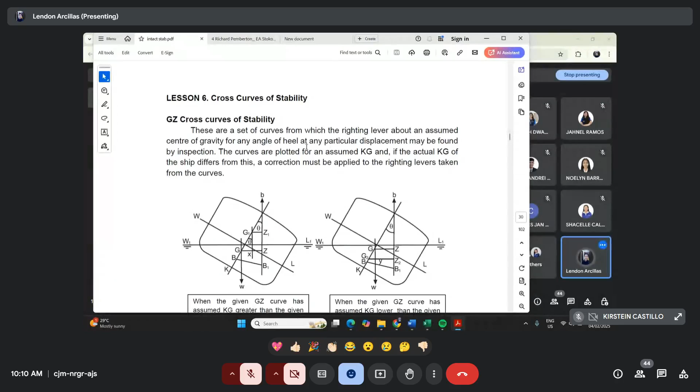Yes, okay. So, cross curves of stability. What is cross curves of stability? Beforehand, there are two types that we call cross curves of stability—the GZ and the KN. I just need two tabs for writing this down.

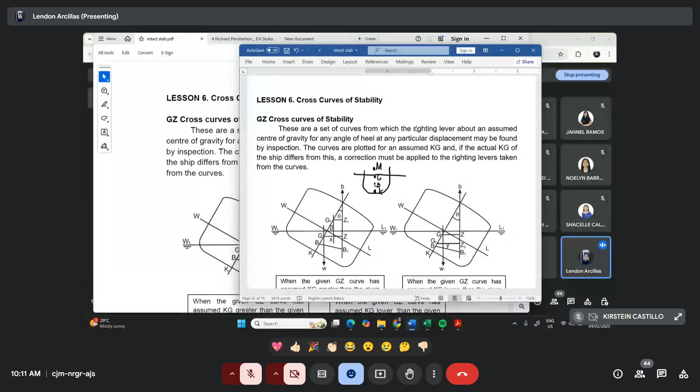When we say cross curves of stability, it pertains to the value of our GZ. We included this before in the moment of statical stability, that's MSS, which uses our GZ. So this is part of our properties. We already have, in our properties, the K, M, and B values, and now we added another property called GZ.

GZ is defined as the righting arm. Let me draw this—this is Z. GZ only occurs when the ship tilts or inclines. So we can only see the GZ when our ship is inclined or listing. GZ is just the distance between the center of gravity point, which changes, and the point where buoyancy acts.

For example, when our ship inclines, the point of center of gravity changes. Of course, the center of gravity itself still remains the same, but the center of buoyancy will change. So this is the center of gravity, and this is the center of buoyancy. When the ship tilts, that's what happens.

The distance from G to Z is what we call GZ. GZ is very important because it is a function of the angle of heel. This is GZ—the distance from G to Z. That's the righting arm needed to find the moment of statical stability, since we need W times GZ, wherein GZ can be found using GM sine theta.

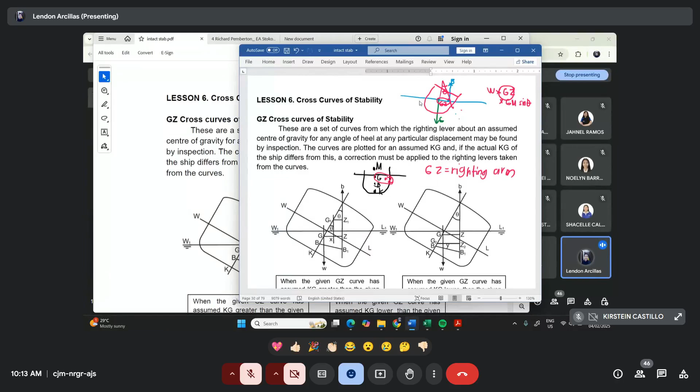So now GZ makes sense. That's our focus now—to find the value of our GZ at any particular angle. It's very important because we need it to analyze the stability of our ship. We can get the moment of statical stability, we can get the dynamical stability, and we can determine when our ship will sink or capsize through the value of our GZ.

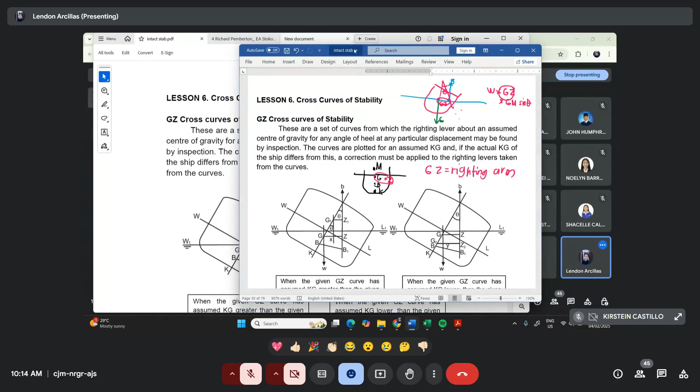So again, there are two types of GZ cross curves: the GZ cross curves and the KN cross curves. For the GZ cross curves, we are given an assumed KG in the problem. Our KG can be found or determined through the inclining experiment. It is very important to conduct an inclining experiment so we can first determine the light KG.

That means that's the first KG of your ship. So our ship really has a KG, and we determine that through the inclining experiment. That's why we have to conduct an inclining experiment, so that we can know the value of our KG assigned to the ship.

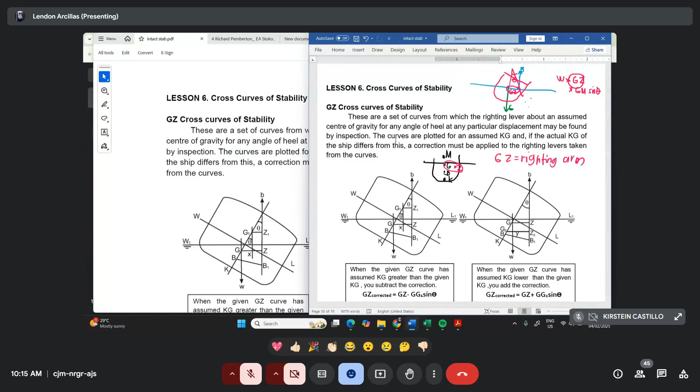Let me repeat the definition. These are sets of curves from which the righting lever, about an assumed center of gravity, for any angle of heel at any particular displacement, may be found by inspection. The curves are plotted for an assumed KG, and if the actual KG of the ship differs from this, a correction must be applied to the righting levers taken from the curve.

So again, the purpose of these cross curves is to find the GZ. There are cases where our given KG in the problem or in our ship is higher or lower in value than our assumed KG. What is the assumed KG? The assumed KG is this one.

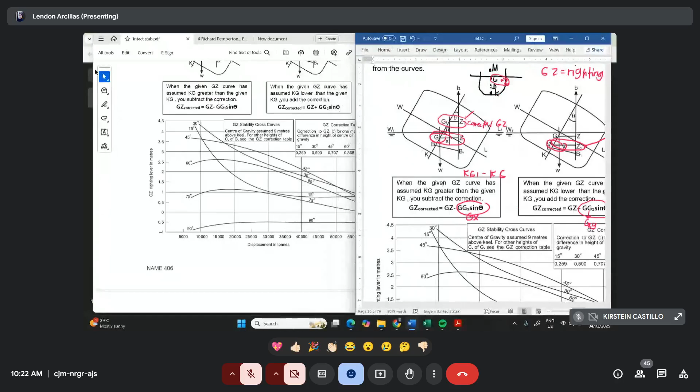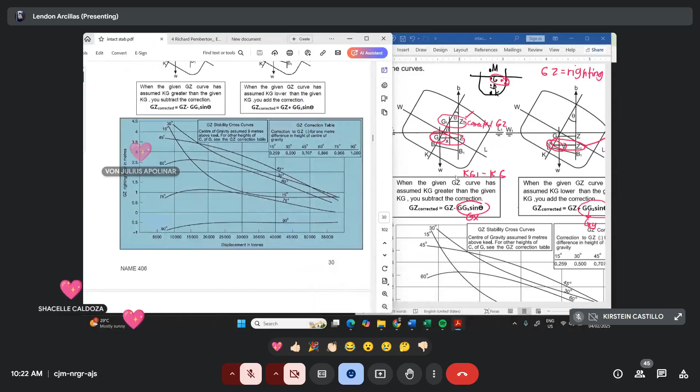Hello? I don't have a mic. Okay, so let's have a problem, to make it clearer.

I just need a graph, that's why my screen looks like this. Using the stability cross curves for a marine vessel tanker. This is the marine vessel cross curves of stability, our reference. This is assumed. Find the GZs at 15-degree intervals between 0 to 90 degrees when the displacement is 38,000 tons and the KG is 8.5. This is the given kg.

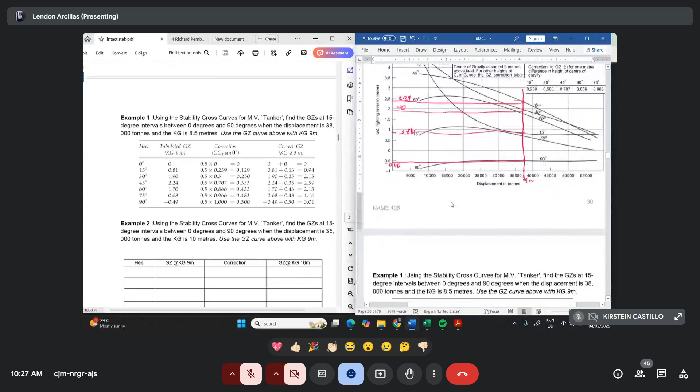Okay, that's the GG1. Next, the sine angle - this is just sine 0, which is 0. Sine 15 is 0.259. Sine 30 is [0.5]. Sine 45 is 0.707, sine 60 is 0.866, sine 75 is 0.966, and sine 90 is 1. Got it? So this is GG1 times sine angle.

That's the value of your correction, which is to be added to our tabulated GZ or assumed kg. Since our given is smaller than the assumed: 0 plus 0 equals the corrected one, then 0.81 plus 0.13 or 0.129, then 1.9 plus 0.25, 2.24 plus 0.35, 1.7 plus 0.433, 0.68 plus 0.483, and negative 0.49 plus 0.5. This is your corrected GZ for the specific problem.

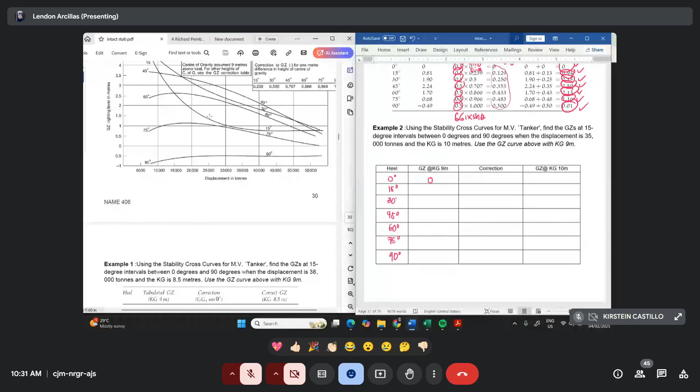Based on my eye estimate, the value of GZ at 0 is 0 since there's no cross curve data at 0 degrees. So at 15 degrees, 35,000 tons, I estimate it's around 0.9.

At 30 degrees, 35,000 tons, this is 2.2. At 45 degrees, this is 2.7. The value really gets bigger here.

If you imagine the drawing from earlier, as the ship inclines more, the more the point of G and point of B separate. G moves further from B - that's the GZ, the distance from G to B.

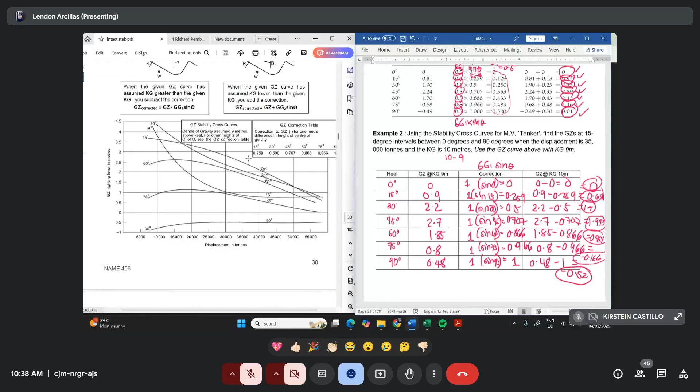So, to recap: when the given is smaller than the assumed, you add. When the given is higher than the assumed, then you subtract. So it's not always the case that the given KG is 9 - I'll give other assumed given values. That's it, no problem.

So that's the GZ cross curves. We also have what we call cross curves called KN. It's the same as GZ, but the difference is the value of KG is always 0.

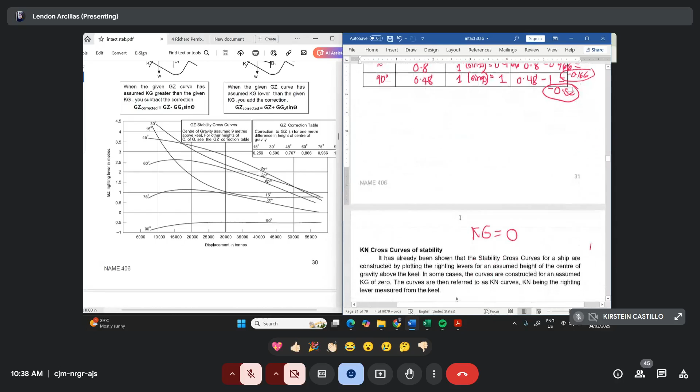Earlier in our given, we had a KG to input, like 8.5 and 10 - not higher than 0. But when we assume that KG is 0, then we'll have to use the KN cross curves of stability.

So, assume KG is 0. It has already been shown that the stability cross curves for a ship are constructed by plotting the righting levers for an assumed height of center of gravity above the keel. In some cases, the curves are constructed for an assumed KG of 0.

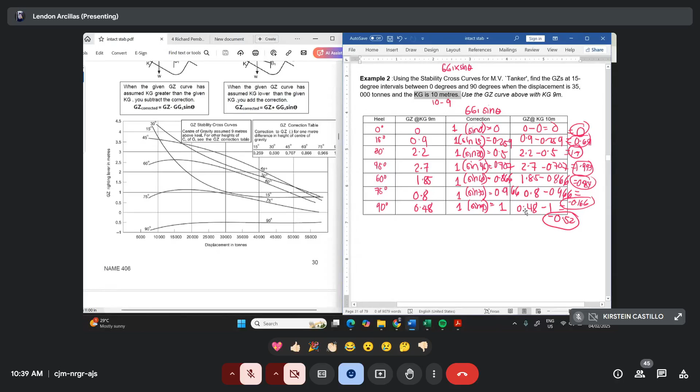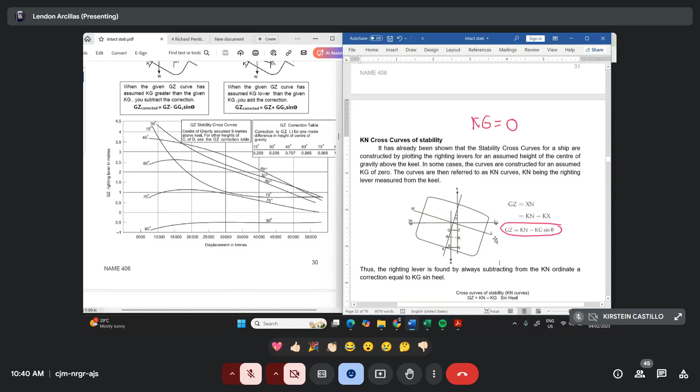So therefore, to find the GZ, it's just Kn minus Kg sine theta. This is the new formula used by 4th year now. In their formula, GZ equals Kn minus Kg sine theta. The Kn is actually the same as GZ, just given a new name so we know the assumed Kg is 0, meaning the given Kg is 0. It also has a curve, same as GZ.

So again, this is Kn or GZ against displacement. They are the same; the difference is that for Kn, the given Kg is 0.

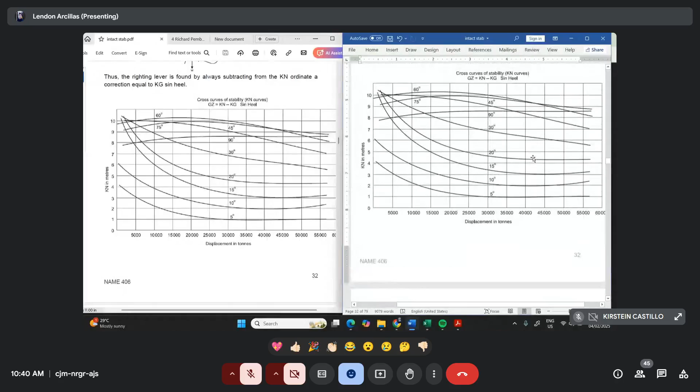Let's have an example. Find the righting levers or the GZ or the Kn for MV cargo carrier when the displacement is 40,000 and the Kg is 10 meters. So what I mentioned earlier was given; the assumed is Kg is 0. That's what you'll do for your ship, since it hasn't been built yet or had an inclining experiment done, so you use Kn cross curves, not GZ cross curves, assuming Kg is 0 here.

Okay, plot the heel from 5 to 90 degrees, then the Kn. Same way of finding it. At 40,000 displacement, look for the Kn on the left side. At 5 degrees, the value of Kn is 0.9. At 40,000 tonnage, the value of Kn is 1.92, and so on - that's how you find Kn.

This is just split up. The sine 5 is 0.087, sine 10 is 0.174, sine 15 is 0.259, sine 20, and so on - separated because this is the formula to find the corrected GZ, or corrected Kn. Same thing - to find Kg sine theta, the Kg is 10.

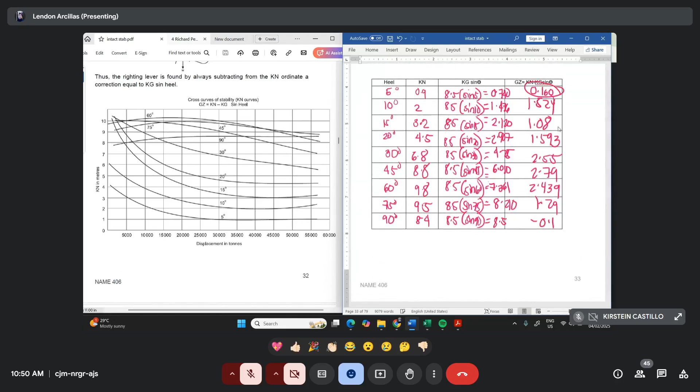Okay, so what is the purpose of this one? So next week na po natin i-discuss itong curve of statical stability. Ang paghahanap lang po ng GZ, yung corrected mismo. Ano po yung purpose nito?

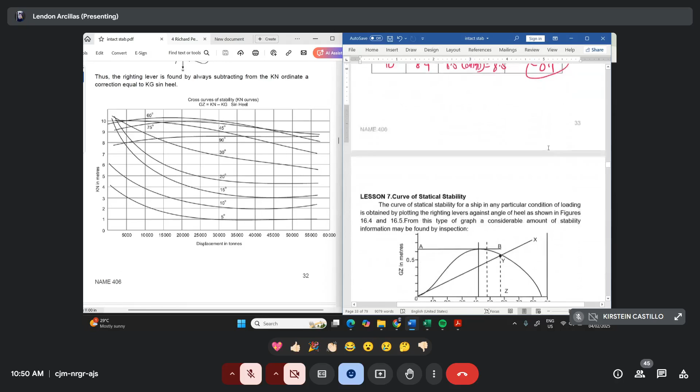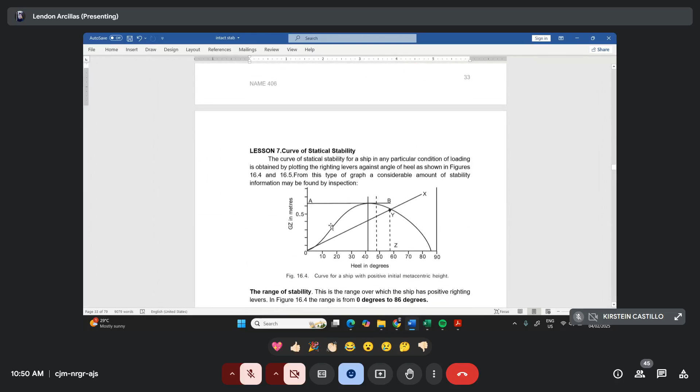So papasok po dito itong next week na topic, which is this one, the curve of statical stability. So right after you get the value of your GZ at a certain angle, ipa-plot ulit po yun. Ito po yung kailangan natin. Ito po yung magdedetermine kung saan, at a certain angle, yung barko po natin ay magka-capsize o malulunod na po. Malalaman natin na malulunod yung barko at a certain angle using this curve of statical stability.

And then, to plot the curve of statical stability, kailangan natin ng GZ, yung mismong GZ ng barko ninyo or yung mismong corrected GZ. Nakukuha po ba?

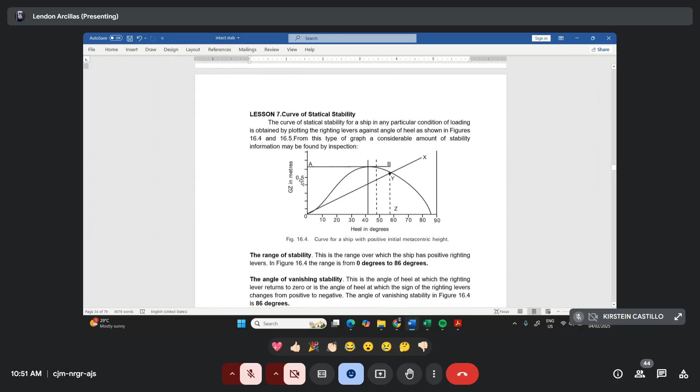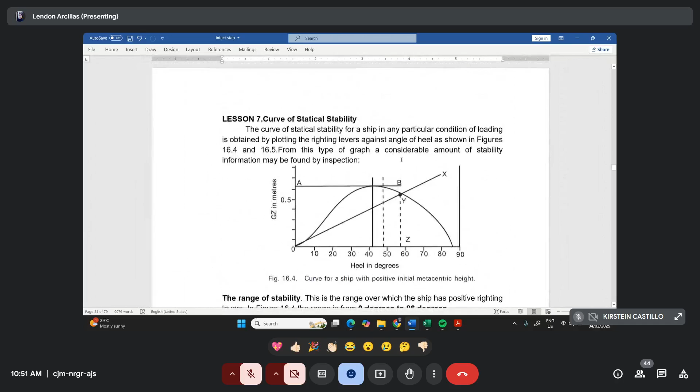Okay, so sa curve of statical stability, sasabihin ko na lang po, makikita dito is the range of stability, the angle of vanishing stability, the maximum GZ, the initial metacentric height. Lahat po, pati po yung angle kung saan po siya nagiging negative stability.

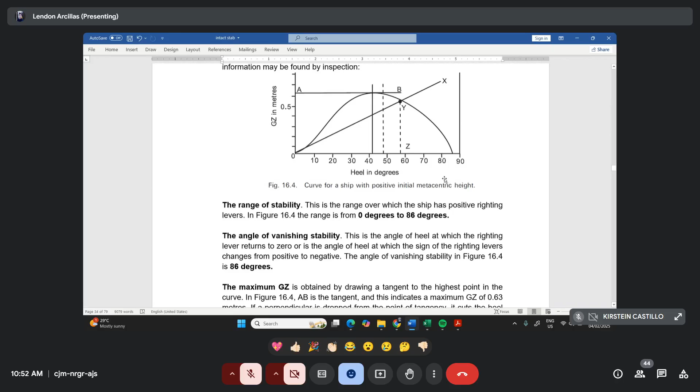So dito po natin malalaman na hindi na po natin sasabihin na pag ang GM ay 0, yun ay neutral. Pag ang GM ay negative, yun po ay unstable, sorry. Pag positive po ang GM, yun po ay stable. Pag positive ang GM, stable equilibrium. Hindi na po ganun ang ating sagot.

Kundi magde-determine po yun sa value ng ating curve of statical stability. Kung tatanungin kayo sa OJT, paano nyo malalaman na stable yung barko namin? Stable ang barko. So sasabihin nyo, sir, kailangan po natin a-analyze ang ating GZ muna, GZ cross curves, and then ipa-plot po by the angle of heel.

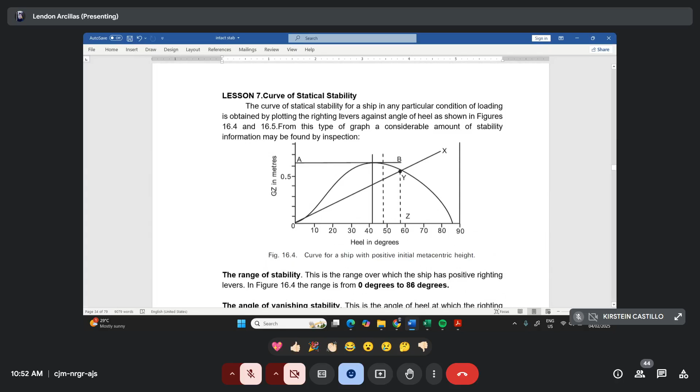So malalaman po natin doon, ang yun po ay tinatawag na curve of statical stability. So doon po natin malalaman kung saan ang angle na nagiging negative po yung stability, nagiging positive po ang stability, ano po yung maximum GZ, ano po yung GM ng ating barko. Makukuha pala dito guys ang GM ng barko.

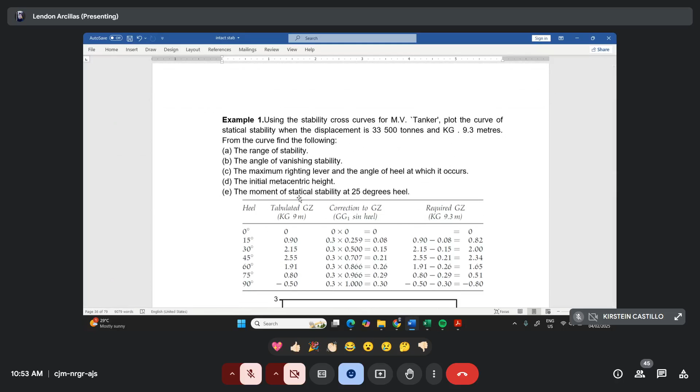So that's our next topic. Sunod-sunod po yan. Next is the dynamical stability. Doon naman natin makukuha kung saan ang pinaka-moment or maximum moment ang kaya lang ng ating barko.

Okay, so yun. So far, may tanong? Hanggang doon lang naman po tayo.